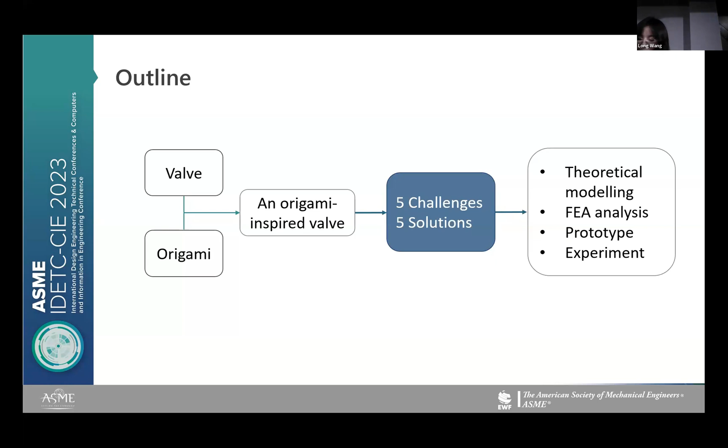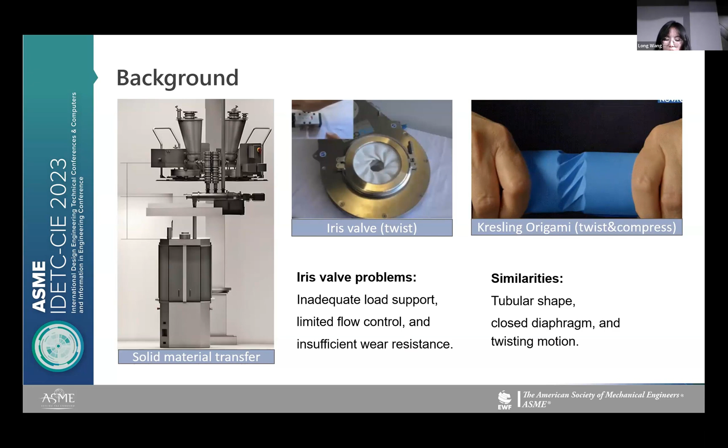In industries like pharmaceuticals and food production, the iris valve is widely used for solid material transfer. However, it lacks the rigidity needed for heavy loads and flow control. Then we accidentally discovered Kresling origami, which also has a tubular shape and a closed diaphragm, but it needs both twisting and compressing. So the 5 challenges we encountered when applying origami to valves are listed here.

First, the combination of 2 motions makes the mechanism difficult to control. Second, this origami design cannot be folded rigidly. Additionally, we need to find an appropriate joint type to replace the folds. Meanwhile, the significant deflection might strongly impact the joint's performance. Selecting a material that matches the joint's characteristics is also crucial.

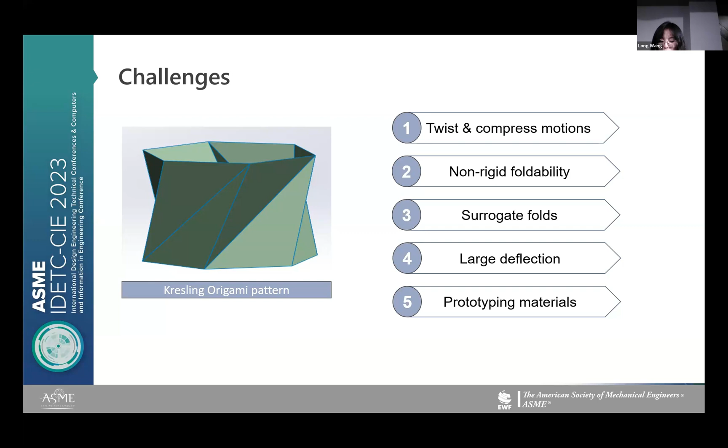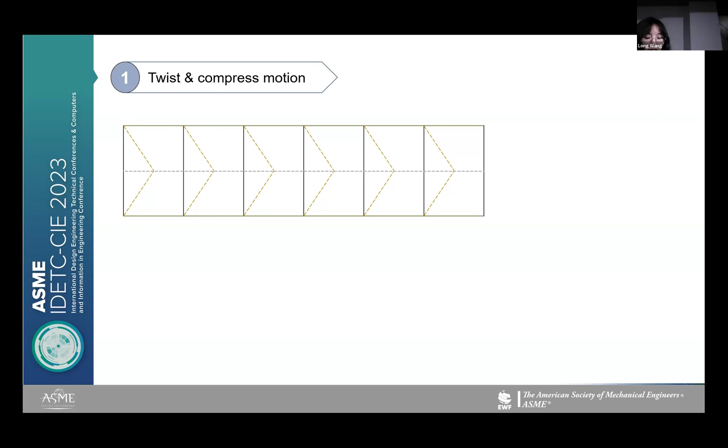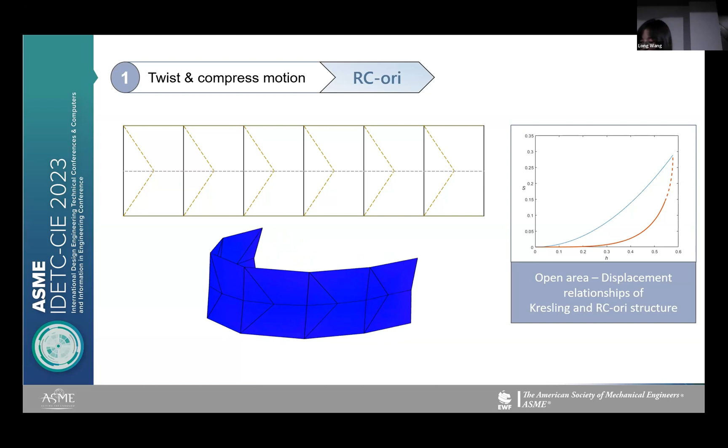To address the first challenge, we split the Kresling pattern in half and mirrored one of the halves. This eliminates the twisting motion without altering the structural size. We named this modified version RC Ori, which stands for radially closable origami, and we discovered that RC Ori is better suited for precise flow control compared to the original Kresling origami.

And the second issue involves the non-rigid foldability. The trajectories of the middle points between each folding unit do not align during the folding process. To address this, we disconnected these points, resulting in a rigidly foldable kirigami.

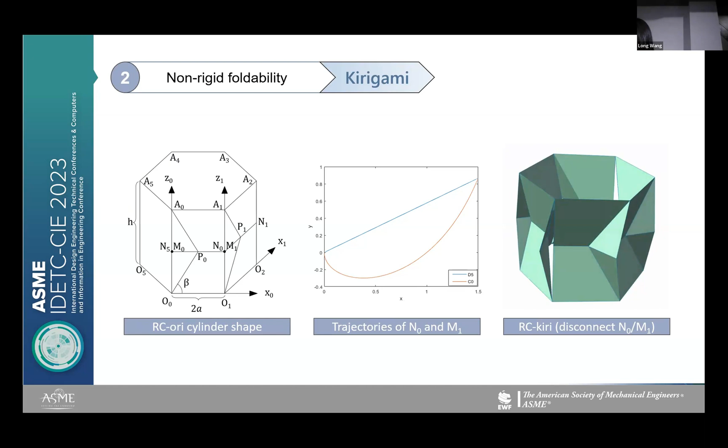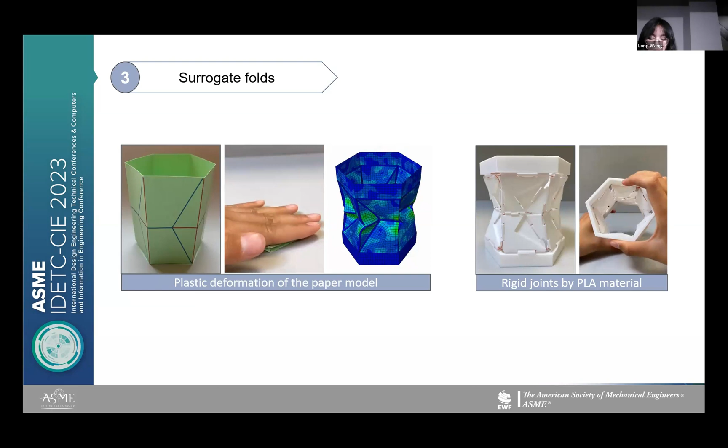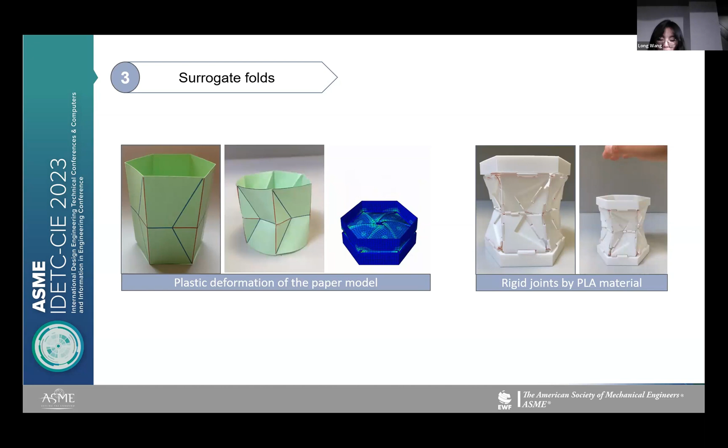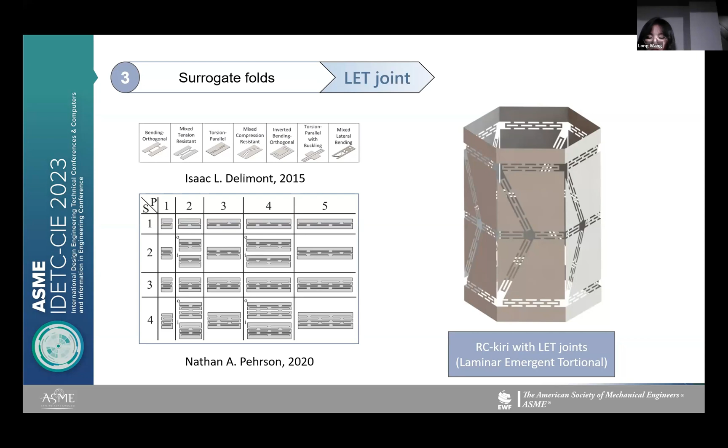And we explored compliant joints. We replaced the folds with a paper model, but it isn't feasible in engineering. Additionally, applying rigid revolute joints adds manufacturing complexity. So we explored compliant joints as an alternative, as they require fewer components and can carry a certain load. Here we selected the commonly used LET joints due to their tunable stiffness.

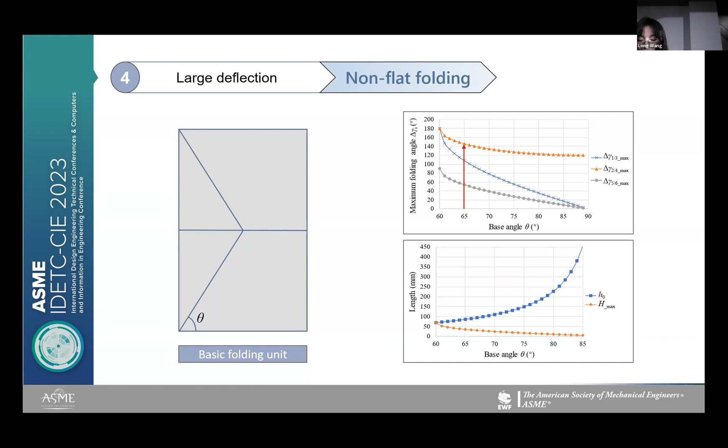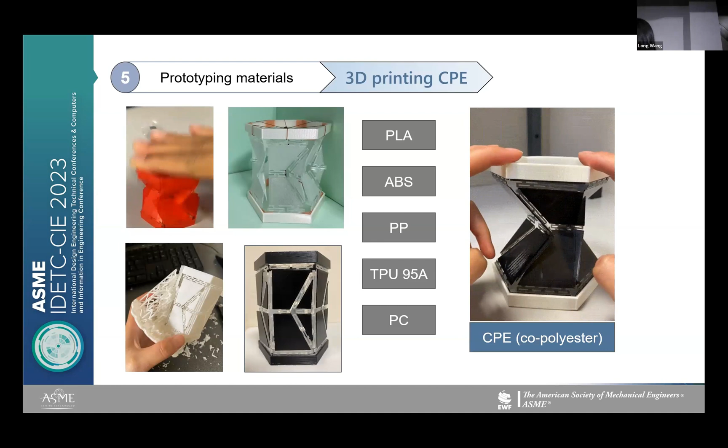And also, to reduce the stress and strain at the joints, we introduced an additional parameter, the base angle. As this angle increases, the folding angle between each panel decreases. Some 3D printing materials are too flexible or too rigid. So through the research, we selected the CPE. It adds panel stiffness while allowing the joint deformation. And the theoretical modeling is based on the virtual work principle.

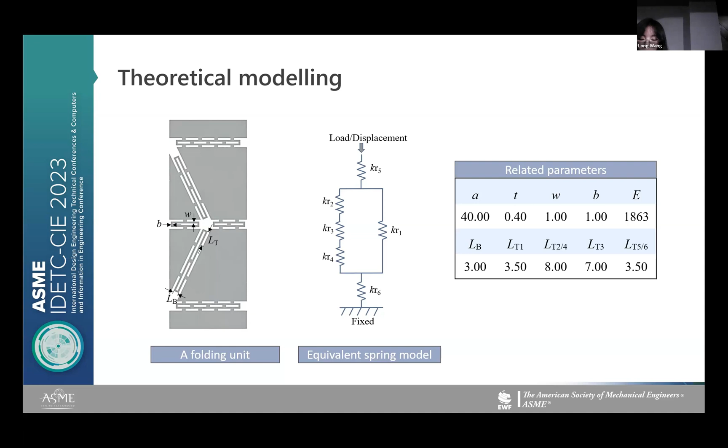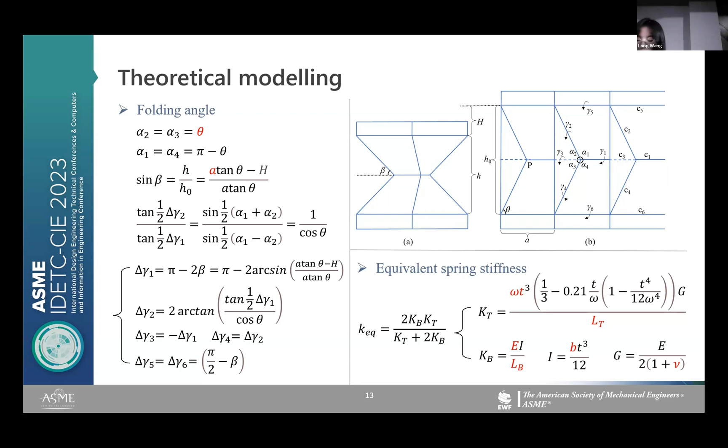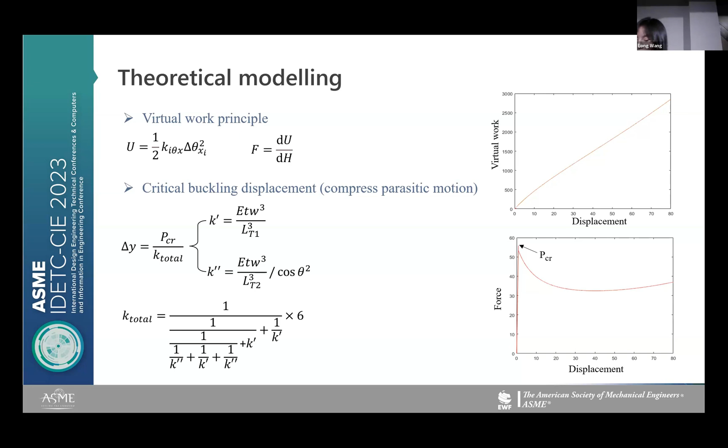Here is the equivalent spring model and the geometric parameters for each joint. And we established the relationship between axial displacement, folding angle for each crease, and the equivalent spring stiffness. But during the stiffness analysis, a buckling point arises due to parasitic compressive motion. Simulation focuses on a single folding unit due to symmetry.

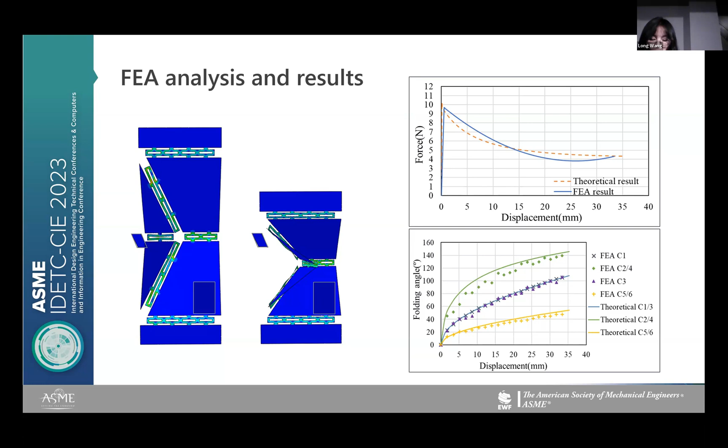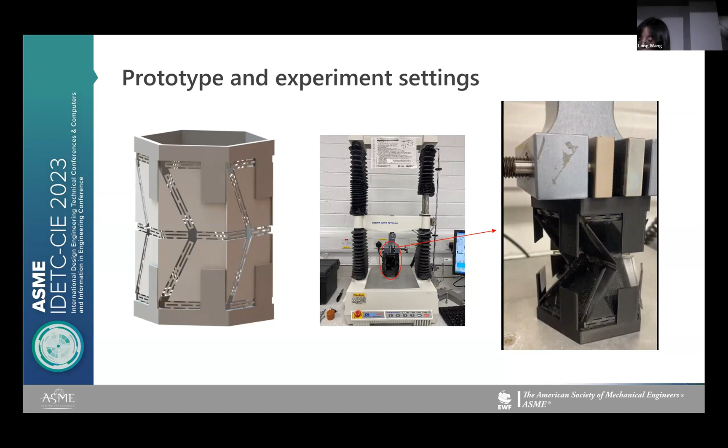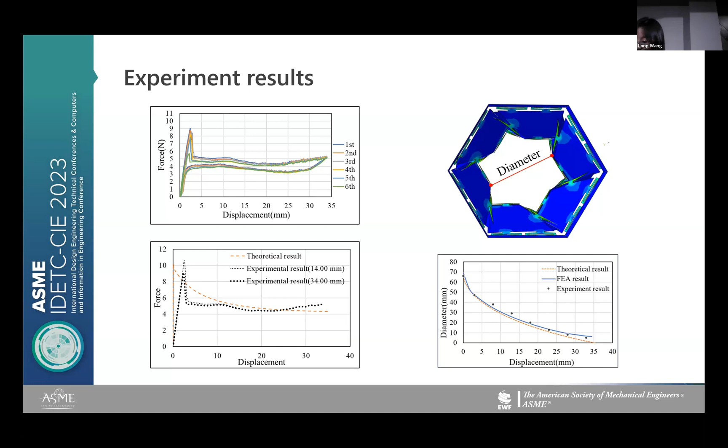Comparative analysis of results is performed with verification through the folding angle assessment. And the experimental validation involves applying displacement and measuring corresponding reaction forces. And also, multiple tests cover 6 orientations of the model, and the comparison of results is followed by verification through diameter analysis. So in conclusion, our work produced a novel iris valve design.

We have successfully addressed these 5 challenges encountered in the integration of origami principles with valve applications. This innovative structure can also serve as energy absorption devices, detection robots, breakers, and more.